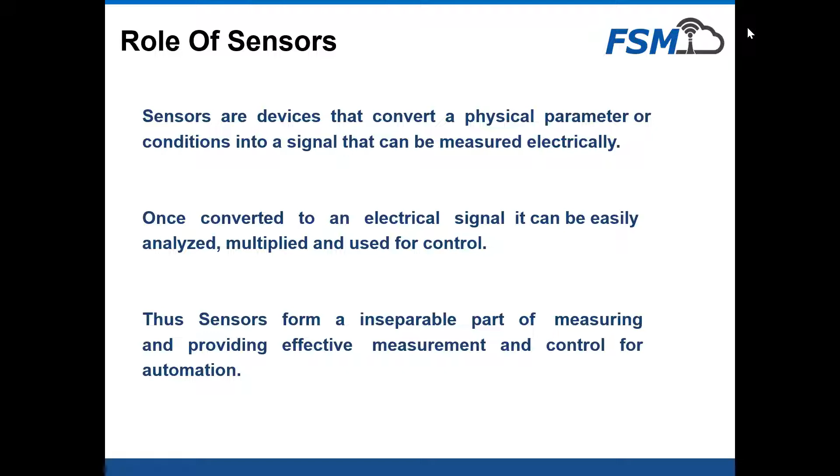To begin with, we all know what sensors are. Sensors are nothing but devices which convert a parameter into a signal which we can measure electrically. So it is a change in the physical parameter which can be converted into an electrical signal, and these signals we can take into our control system, and then we can do decision making concepts or control the loop, making a proper closed feedback system.

We can see sensors being used in almost all types of industries, whether it's manufacturing, engineering plants, automotive industry, mobile equipments, material handling - which is an industry coming up very widely in the world as of now - printing and paper, food industries, processes, packaging. So all types of machines being used or present in manufacturing, they use sensors for controlling the system, giving feedback to control the machines.

Now in this presentation, I would be discussing different technologies that are behind the working principle of these sensors and how these sensors have evolved.

When we look into the industrial application portfolio, we can see a couple of years down the line, major applications that we were seeing in industry were detection type applications. Detection means detecting the presence or absence of a component, whether they are present or not, and the sensor would generate a digital output or a signal.

Now this has evolved into measurement systems. That means not only does the sensor sense the presence of a component, but also gives you the measurement values - in terms of how far the object is from that particular sensor. Further evolvement happened when it started giving you position values - that means it can give you the exact position where that system is, with a high accuracy of few millimeters. That is quite possible.

One application we have seen in the industry is where we sense the wheels of a wagon - the wheels of the train that is coming by. This is an application seen in a metro, a daily metro, or a DMRC application. These trains, as they move on a platform or track, need to be lubricated. There is a lubrication pump attached, and at certain points in time, lubrication needs to be done. So these sensors are mounted on the track.

As and when the wheel comes into that area, meaning the train has just arrived or is there, it gives a feedback. The feedback goes to the controller, which opens and generates an output so that the lubrication of the wheel happens in the system. This is a basic sensing application where we sense only the presence or absence of a metal target, and based on that we take a call and perform a certain operation.

Similarly, there are a lot of applications where we need to detect presence. Weigh bridges are one such application area - we weigh the load being carried on a train. We need to measure the weight of that truck or bogie. When a wagon arrives at that weigh bridge, we need to take a feedback.

When the wheels are at a proper location, only then should the feedback be taken, and the weight taken into the controller. So these sensors make sure they sense the wheel in a proper position. A combination of multiple sensors positioned at different distances enables detection of the wagon at the right or appropriate position, thereby taking the weight of the wagon and giving it to the controller to decide how much material is stored in that particular wagon.

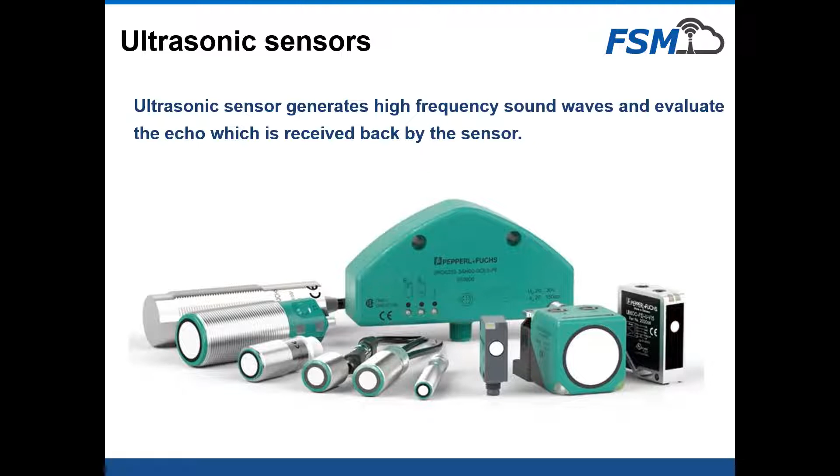So these sensors are widely used in applications where we need to measure the level. One such application is measuring the level inside wagons. This is one of the applications we have done for a steel industry, which has a train carrying raw material. The raw material is in the form of coal or coke, carried from the mines. Here we need to check the level, how much this wagon is filled, whether it's half filled, full filled, or empty.

For this, none of the sensors would work properly except ultrasonic sensors, because photo sensors, as I said, will not be able to detect the difference in colors. So ultrasonic sensors mounted at the side or at the top were able to measure the level inside the tank, inside the wagon, and generate an output. Based on that, we can check whether it was half filled, fully filled, or empty. These sensors also have the flexibility of giving an analog output, meaning you can get 4 to 20 milliamperes directly as an output. So that was one application done for checking the level inside the wagon.

Secondly, another application we come across: most wagons used in the industry are very old, and over time, the walls of the wagons bulge out. They bulge out because of the load being carried, since the material is dropped from a certain height, damaging the walls of the wagon. So when the wagon is entering a house, it should be within a certain bandwidth, else it can collide or crash with the wall and damage the whole structure.

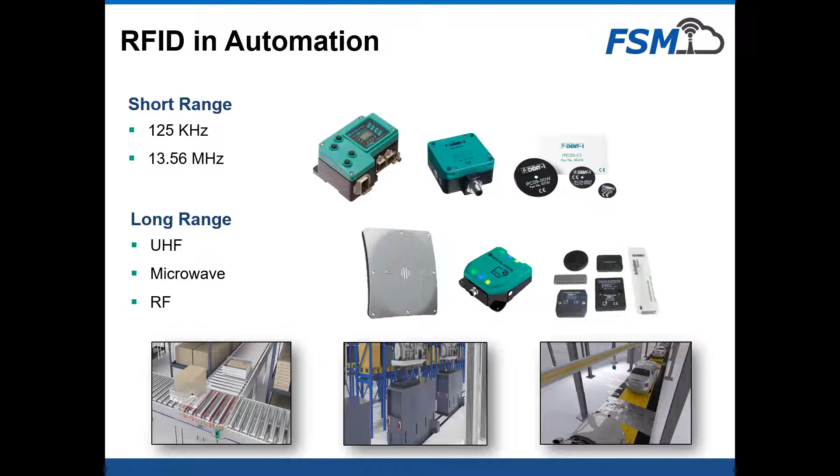As the component moves from one point to the next point, all the relevant operations that have been done on that component are stored into the tag. And at the end of the production, all the information is read back from the tag and stored inside the servers, thereby maintaining the genealogy of the product from the raw material to the final finished product. So this is what RFID systems can help with in the industry. Let me share with you a couple of applications that we have done or we have seen in the industry. Identification and tracking, as I was saying, is a very common application.

Since you all are from the railways, you must have heard about TCAS, that is Train Collision Avoidance System. What we do in this is we have a reader which is mounted below the engine. The reader has to read a tag which is mounted on the bed of the track. When the train approaches, the reader will read the tag and give the information to the controller of the engine, and from the engine it gets to the centralized location. That means this train has reached a particular location. So if there are two trains approaching on the same track or nearby to each other, the location is automatically transferred, and based on that, the controlling can be done. This was a project, I don't know at what stage it is as of now, that was started a few years back where RFID was considered as an option for collision avoidance.

Another thing which I've also seen is the same system being used for certain engines, I don't know the exact word, please help me out with that after this. There are small engines which have equipment inside them, which are supposed to monitor the track of the particular route. This engine is equipped with all types of equipment for checking whether the track is fine or not. So if there is a problem at certain locations, how do we identify that? Here again, the tags mounted on the beds are used. The reader reads the location, and based on the parameters, they know at which particular location the track was damaged or would require repair work. So this was another application which I have seen in railways.

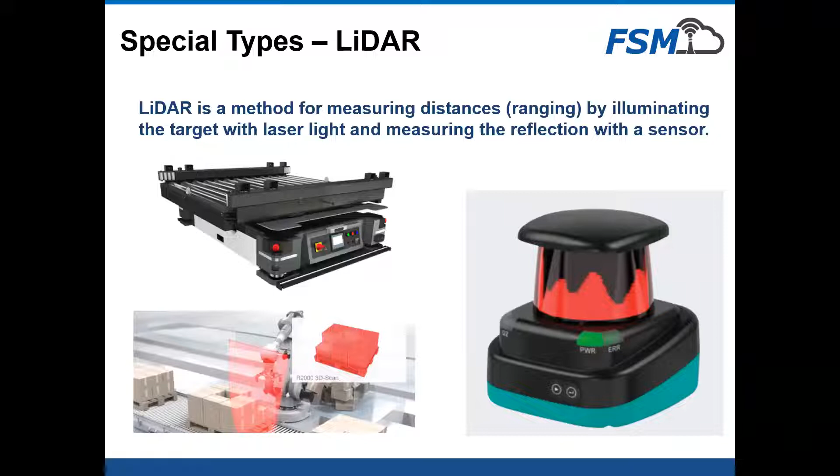These types of lidar sensors are also widely used in industry in material handling where we have AGVs. Today we talk about AGVs moving, and AGVs are automated guided vehicles. These vehicles move from one point of the plant to the other carrying raw material without any operator on them. So lidar sensors are used for navigation purposes. The same thing can also be used for profiling of the component.

There is a simple application example where we use this type of lidar to check whether this particular truck is empty or not. Since the lidars are rotating at a very high speed, we are able to generate a point cloud. We are able to pick up the points and measure the distances at each and every degree. And based on each and every degree, we are able to get the distance of the object.

And based on that, we are able to make the profile of the whole truck. So we can know which area was empty and which area was filled up. So this is an application where lidars are widely used.

Moving on to some special sensors, vibration is one of the most important aspects today. We need to do a condition monitoring application. That means we want to measure certain key parameters of the motors that are being used, and vibration is one of them. So vibration sensors measure the amount of vibration that is there, and based on the vibration, it will generate a 4 to 20 milliamperes output.

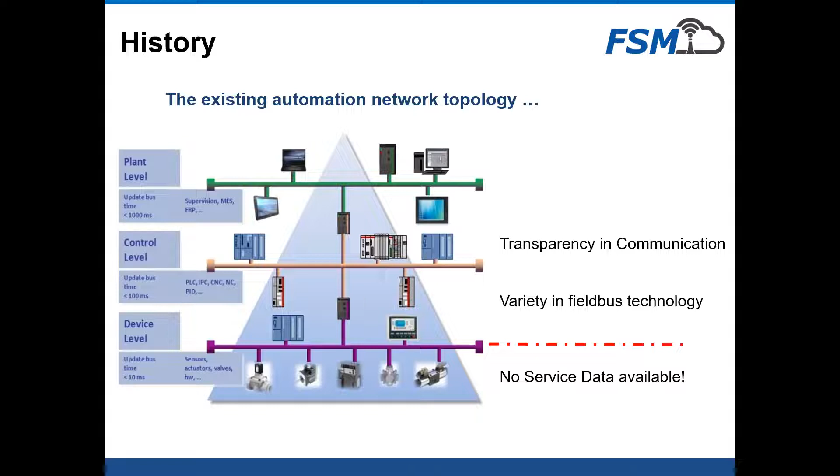But now these sensors are so developed that the field devices at the lowest level of the hierarchy can now communicate directly to the ERP system, to the plant level, or also to handheld smart devices. These sensors at the lowest level did not have any service data. That means they were only able to transfer a signal in the form of digital, that is 0 or 1, or an analog signal in the form of 4 to 20 milliampere or 0 to 10 volts. That was only a one-way communication.

So now, since we are talking about Industry 4.0, we want these sensors to become smarter. They should not only transfer the information, but also be able to receive communication. That means it has to be more of a two-way communication. Plus, they should have memory inbuilt. They should have an identity and be able to identify themselves. They should be able to do diagnostics. That means if a sensor is about to fail, the sensor itself should give feedback that I am going to go down, and based on that, the sensor can be replaced before the actual failure happens.

All this is now possible with a technology inbuilt into a sensor, which we call IO-Link technology. IO-Link is a communication technology that is nothing but a small chip added into the sensors, thereby making them smart. These sensors can now not only transfer the basic values, that is the digital signals, but also do diagnostics at the sensor level. They can do continuous communication with not only the PLC, but also transfer the information directly to the controllers at the plant level, or directly to the cloud.

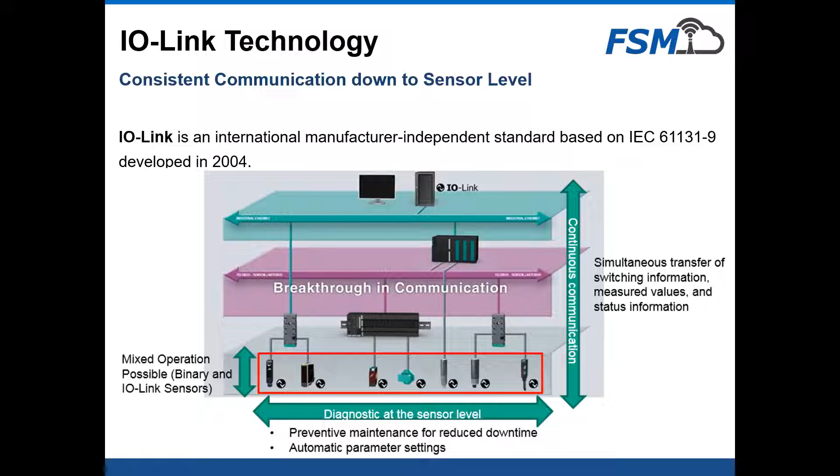Another benefit is that with this technology, it's a bi-directional communication. Like I said earlier, the sensors were doing only one-way communication. They were only giving you the feedback. But now the controller can talk to the sensor, give it a command to reply back, and based on that, the sensor can transfer the information back to the controller.

So what all can we do? There are a lot of other parameters apart from the process values we can get from the sensor. We can get the health of the sensor. We can get how many hours the sensor has been working. We can change the parameters of the sensor remotely. We can get all servicing parameters. All those parameters are now available inside the sensors, and for that, we are no longer dependent on PLCs. We can do it remotely. From my control room, I can teach a sensor according to my need.

I'll give you a simple raw example. For example, I am using a small ultrasonic sensor, which is supposed to detect the object from a distance of, let's say, 100 mm. Tomorrow, the size of the component has changed and increased, and the sensing distance is reduced to 50. So what I need to do is go to the machine, go to the sensor, and teach the new parameters to the sensor so that it can work accordingly.

But with this IO-Link feature, if I have a sensor connected to the control room, sitting at my control room I can change all those parameters. So wherever we have batch processes or processes where we need to change the parameters frequently, all that can be done sitting at a remote location.

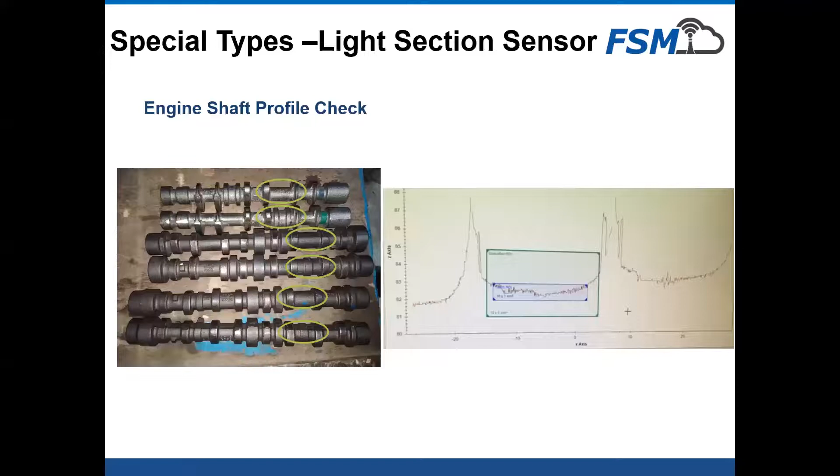Sir, in railways, we prefer wheels with a certain profile. Can this profile type sensor be used for detecting whether the profile has gone wrong? Because some derailments have taken place due to the wrong wheel profile. So can it be used here? Yes, sir, exactly. The sensor I showed you with vision built into it, this one, can be used, sir. We can check the profile because, as I said, it can check the gap, the angle, the stretch, and everything. So this could be the right product for that.

Okay. And my second question is regarding the water in the tank. We have a lot of watering points in different locations. Can the sensor be installed in the water tank of coaches so that we know the quantity of water in a particular tank? Yeah, we can do that, sir. See, what we have generally done, not only in railways, it can be done at a lot of other places.

Like you were saying, in a water tank, the sensor can be mounted at the top. Based on that, these sensors can generate not only switch output but also analog output, so if you want continuous monitoring, that is also possible. We teach the sensor the empty level inside the tank and the filled level, and between empty and filled, the sensor will generate 4 to 20 milliamperes, so we know how much it is empty or how much it is filled.

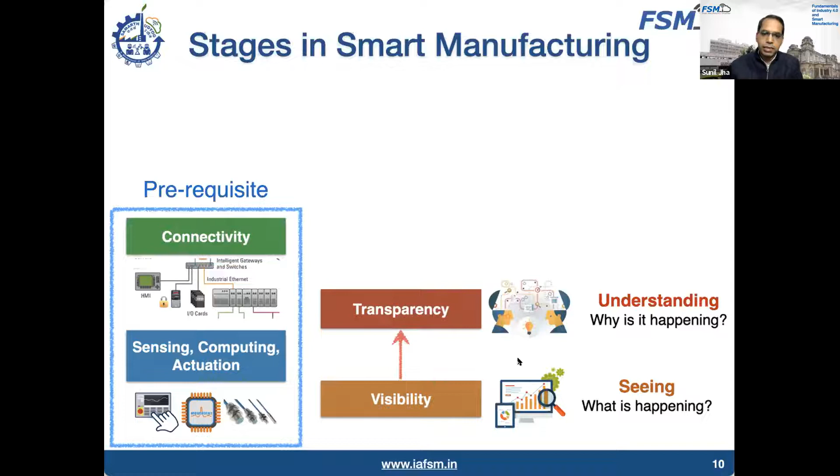Once we build this transparency, we talk about building predictive capacity in the organization. This is a very important part when we discuss predictive maintenance, prescriptive maintenance, and the proactive approach I discussed yesterday. We will be preparing the organization for such incidents in advance. That kind of predictive capacity can be built through the implementation of these technologies.

So once you have that data in the system, these are all the services that build on top of that data and the information generated. You will be building predictive capacity in the organization, preparing it for such incidents to happen before they actually happen. That is the next stage.

Later, we implement the adaptability part, which I also discussed yesterday. Finally, we want action to happen - corrective action should be implemented and the system should self-adapt to changes. Whether it's optimization or corrective actions to be taken, we are looking forward to such autonomous decision making happening at the system end, which will then be finally implemented.

That is what we are looking at right now at the higher stage of Industry 4.0 implementation. As we go along these stages, we build these capabilities in the organization to reach Industry 4.0 implementation. We start with the basic building blocks, which is where most industries are right now - establishing connectivity, bringing out data, and I'm happy that most are able to reach the visualization level. Post that, building transparency, predictive capacity, and adaptability is the next stage of implementation. What kind of services you can build on top of that data is more important to reach the last stage of smart manufacturing implementation.

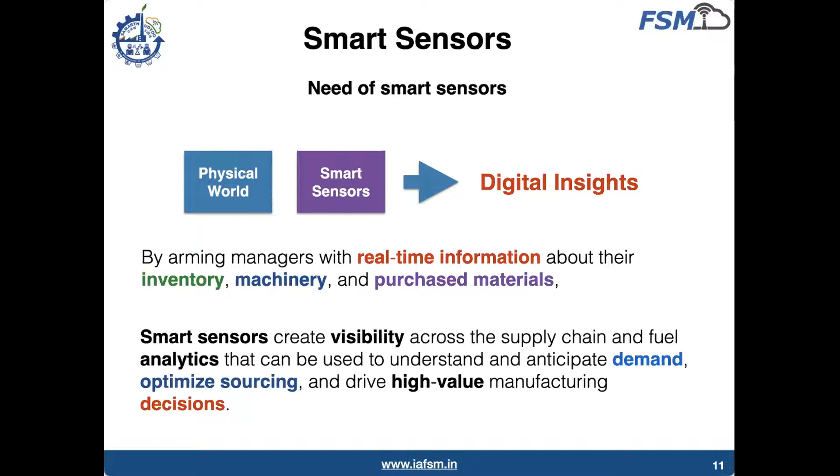So that is the idea of getting a smart sensor - not just a parameter, but much more additionally. Many times the sensors are also now capable of doing some basic analytics themselves. So if you look into the future of sensing and the recent developments today, actually, it's not just a sensor - you need to build a lot of technologies at the back end to utilize the information coming out from the sensors.

So when we talk about recent developments in smart sensors, certainly the basic parameter you capture from the sensor is one important part. But then you need a lot of analytics tools at the back, because what are you going to do with this data - who is going to analyze it? To extract meaningful insight from the sensor data, you need access to analytics tools, and that is how you will be able to analyze all the sensor data coming to you and make a meaningful inference out of it.

How you are going to handle this data - just placing a sensor will not serve the purpose unless you have a backend system to handle and manage this data. That is where the role of big data comes in. People are talking about multiple types of data - vision data, sound signals, vibration data. So there's a lot of types of data coming, and how you will manage this big data, what kind of platform is required to handle it - understanding and the capability to handle this kind of data is also required.

So implementing smart sensing just starts with a basic sensor, but then you require a large number of technologies at the back end to really utilize the sensor information.

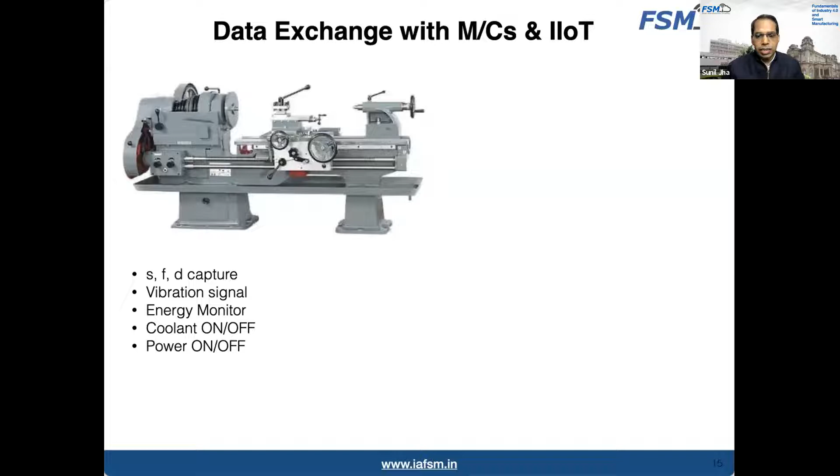So this was the problem we were discussing yesterday, that we would like to convert a machine into a smart machine, and we talked about the different sensors to be integrated into the machine. But after that, how will you exchange the data between the machines and the IIoT? That is how I will be explaining this block further. To implement connectivity to this machine, certainly we would like to place multiple sensors onto this machine. So whatever Sudhanshu has explained, let me just carry that discussion.

So we have converted this equipment, which is a legacy machine, in our central workshop with the integration of multiple sensors. The first idea for implementing on any legacy machine is to think about the machine and the need for those critical parameters. Then we have to identify the right sensor for the application. In this case, we need to measure the feed and depth of cut, and these are all displacements. So we need to identify a right displacement sensor for the measurement of the depth of cut and the feed rate.

So if you can see, along the bed of the lathe machine we have placed this feed displacement sensor. Across the carriage, we have placed the sensor for measuring the depth of cut. And when you have these kinds of sensors placed onto the machine, you need to have some kind of controller to capture that data. So we have used a small controller with an HMI inbuilt into it. All the analog sensors are interfaced to that.

We also have some proximity sensors to sense the RPM of the spindle, and to sense the presence of a key for tightening the chuck. As a safety measure, we have integrated that part. Then there are the vibration sensors, how you will take out that vibration sensor information, and certain IOs. We also added RFID access to the machine. So the idea is that once you have these kinds of sensors and devices, you need to connect them to the controller. That is what has been explained.

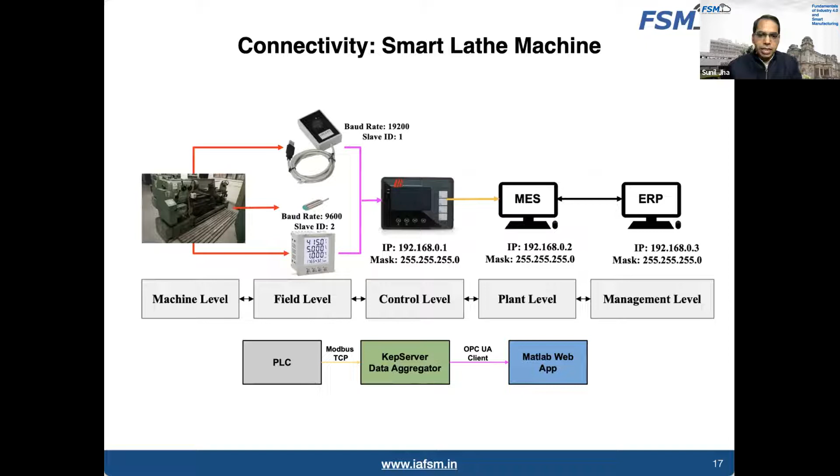And then from there, we will be taking it to the manufacturing execution system and the ERP systems. So that is where the connectivity of the lathe machine till the enterprise level is very important. What I was just showing, the multiple layers. So we have done this project, and we have already exercised the implementation of the concept of the IIoT in this case. What all tools are required to implement this is very important to understand.

And then certainly you can build up these kinds of smart applications once you have the data, for visualization and for monitoring purposes. So what I will suggest, I will try to utilize the rest of the time in the first session itself to give a quick live demonstration. My colleague, Mr. Arun Kumar, has joined from the FSM lab. I just want to give you at least the practical hands-on on what we are talking about, and the theoretical part will continue in the subsequent sessions.

So I will stop the sharing over here. I will request Arun to please be available from the FSM lab and then share the connectivity part with the sensors. Over to you, Arun.

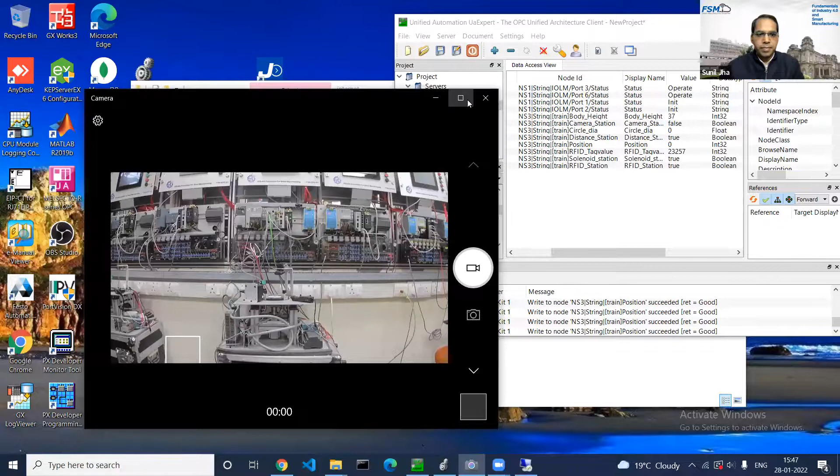Hello, thank you, sir. Good afternoon, everyone. I am Arun, and I'll start this session by introducing you to the components of the PLC training kit. Arun, we can't see you right now. Can we see where you are right now? So you will be explaining those systems, so then we can see it. Yes, sir. Sir, is the screen visible now? Yes, Arun, we can see that.

Okay, so I'll start by introducing the components of this kit. This is the smart kit which we have for demonstration purposes. The first component is the SMPS, that is, switched mode power supply. It converts 230 volt AC into 24 volt DC. All the devices used in this kit use 24 volt DC input, so this device provides that input to the other devices.

Then the next component is the PLC. This is the brain and the controlling device of this kit. All the programming is done in this PLC itself. It has embedded DIs and DOs. It's a Rockwell PLC in this kit. There are other kits which have other controllers like Siemens and Schneider, etc. Then this is analog input and analog output. Then this is the Ethernet switch.

It's a managed switch. The difference between a managed switch and an unmanaged switch is that an unmanaged switch only lets the devices communicate with each other, and it does not provide any security in that communication, whereas this managed switch provides the security part. So you can configure the port depending on the device which is connected on that port.

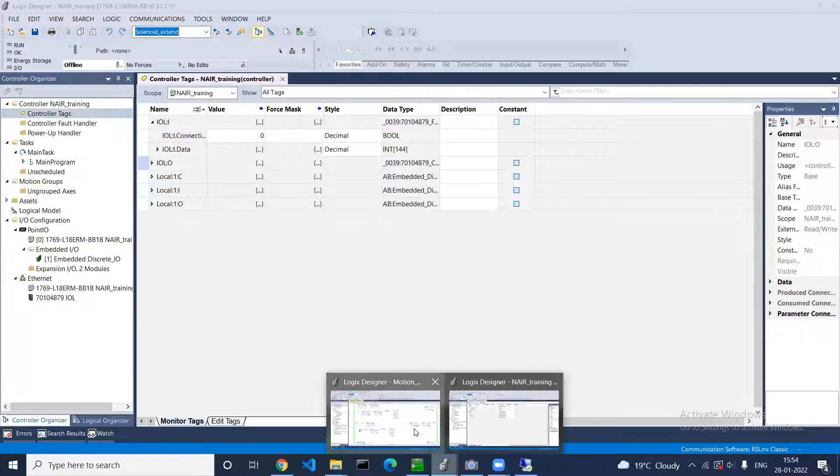So these are the bytes. So in IOL:I, you will get the input from the IO-Link master, and you can also give output to that IO-Link master using this IOL:O. So I have already downloaded one project in the PLC. I will just show you that. So this is the project, and

these are the input bytes of the IO-Link master. So this is the RFID data which IO-Link is communicating with the PLC. These are the input bytes, and these are the output bytes on which I can write. So these are the bytes which are used to write on the RFID tag that is present on the part. So I'll just show you by rotating the disk how this RFID controller is reading the data from the RFID tag.

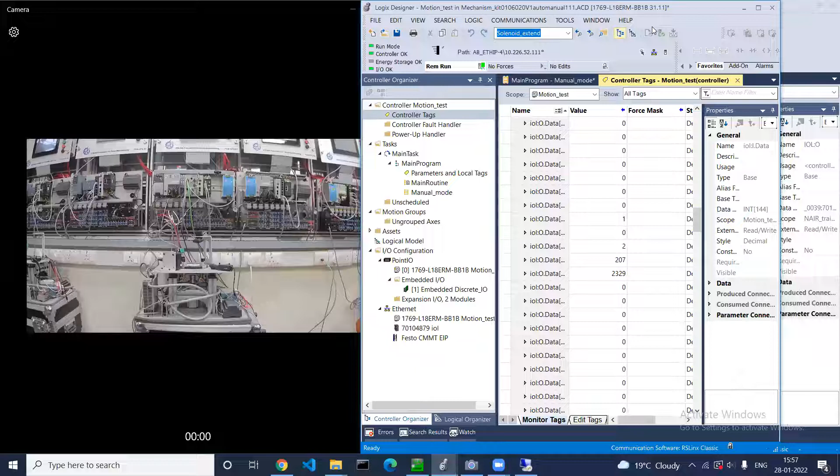Now I'll show you how to send the data from this PLC or from this IO-Link master on OPC UA. So you can also send the data from the IO-Link master directly through OPC UA. So this is the KEPServer platform. This is used to collect the data from your hardware controller, and then you can send this data to any IoT platform.

So you just have to create a channel. So these are Allen Bradley for Rockwell PLC. You can use these Ethernet channels also. And for OPC UA, you just have to add OPC UA client. So I'll add this IO-Link master directly to this KEPServer platform. And you can see the tags.

So I have created a channel with name IOL, and now I'll add the device. So now I'll import the items, that is, this KEPServerEX will import the tags from this IO-Link master. So this is communicating, and I'm getting these tags. I have connected these sensors, RFID and this ultrasonic sensor, on port 3 and port 6. So I'll just add the status of port 3 and port 6.

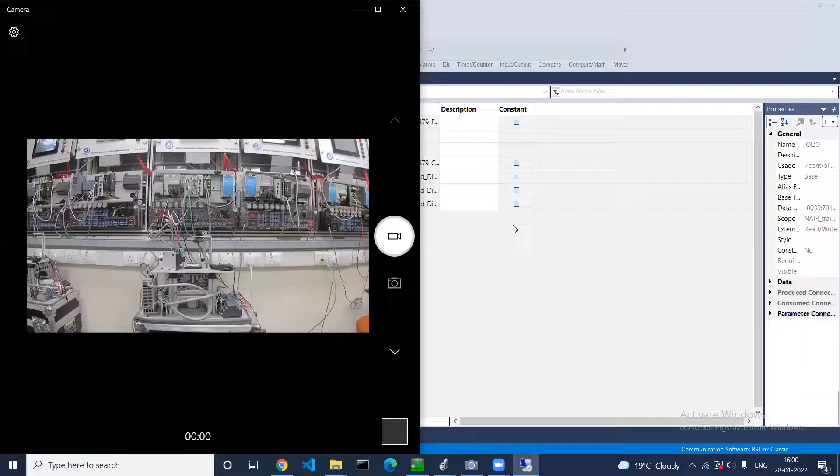Similarly, I can also add the PLC and I can get the tags of this IO-Link master through the PLC communication also. So I'll just show you the dashboard for this kit, and when I rotate the kit, you will see this tag value, height and diameter parameters changing. So this is the IoT platform. You can access this dashboard from anywhere. So I'll just rotate the disk.

And now you can see the data changing from this RFID, for this RFID tag, and the height of the product.

Thank you, Arun. Anything else you are showing? No, sir, I think. Okay.

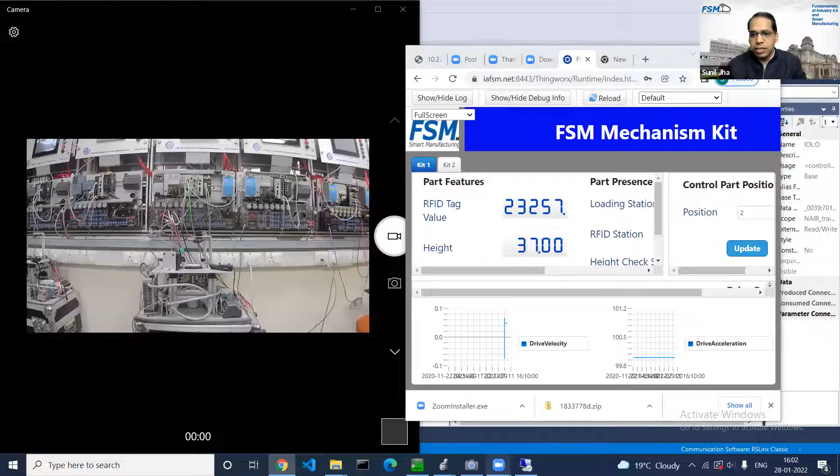Thanks for this quick glance on the kind of technologies involved in getting the data from the basic sensor and how we will be using that sensor data. So the idea behind this 15 minute visit to the lab and giving you an idea about the different platforms involved is just to understand the kind of technology understanding required to bring out the data from the systems and finally take it to the IIoT platform and create a visualization.

Because till now we have just created the visualization. So we'll subsequently discuss in the coming sessions how these implementations happen, and within the time available to us, I will only be giving you the overview of the technologies. Normally when we conduct detailed in-depth sessions, we take all the participants through these hands-on exercises, because it is very important to understand how these things will be implemented.

And this revenue stream benefit is not particularly for end users like railways, but on the OEM side, there are various business models like selling compressors on an OPEX model, where OEMs charge the end user for the amount of running hours of the equipment. Those kind of revenue streams are also possible with the help of smart machine technologies.

Then it also leads to IP protection, which is a big topic today. Cyber security. Many of these machines have vulnerability to IP protection, right? So any vendor can come with a mischievous intent, and they can steal the IP of the machine. So with the help of digital technologies, companies can ensure that they build defense in depth concepts into the basic machinery, so that their IP stays with them. So it reduces risk in that way.

Some of the common challenges we hear from the market when we talk to customers regarding digital transformation is that customers don't have time to execute digital transformation projects, or they feel their machines are already smart, or their IT department won't give them permission, right? But sooner or later, everybody is going for these kinds of initiatives. The IT department may not give access, but definitely for the CEO of a company, for improving the COGS or the turnover profitability, these initiatives are a must.

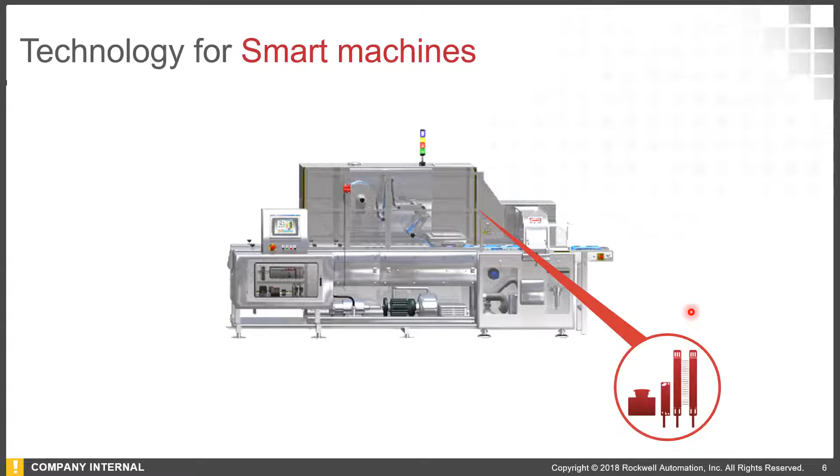Based on this stored data, we can create more efficient workflows for the machine so that it performs at the highest optimal level. That basically constitutes the smart machine - how we are able to turn real-time data into a contextualized report, to analytics, to optimizing the workflows. If I talk about basic technologies for smart machine, the first one will be integrated safety. So generally a saying goes like productivity is inversely proportional to the safety system, but that's not true.

The higher the safety on the machine, the more productive it will be. That has been our experience, and as per studies done by global agencies as well. So integrated safety is absolutely a must building block for building a smart machine. Then smart sensing - with the help of technologies like IO-Link, it is possible to take the sensor onto a network and collect relevant diagnostic information from these sensors so as to increase the uptime of the machine and also improve the process workflows.

Then smart motor control - you may have VFDs, soft starters built into the machine, but how do you leverage the information coming out of the smart motor control systems? That also constitutes a building block for smart machine. And then once you have all this, on top of it, we have IoT platforms, which ensure that the machine provides value beyond its own sum.

This machine may be producing one component or doing one task of the operation, but with the help of smart machine, it can provide greater value to the entire organization than its sum. If I talk about the first one, the integrated safety - this is a graphic for a plant. This plant has machine safety components built into the machines. As you can see, the diagnostic available is of an advanced level.

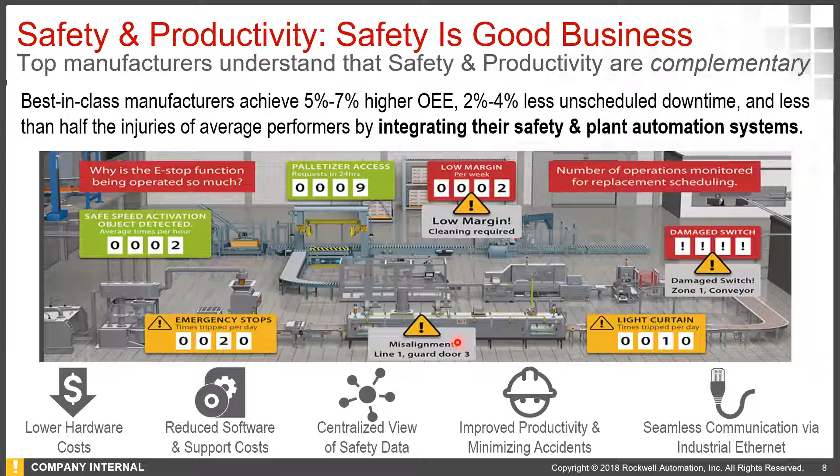Second component is smart sensing. With the help of IO-Link technology, you can take sensors onto an IO-Link network, and with the help of that network, sensors will themselves give diagnostic information through the network, like parts count, or if the sensor is overheated, or there is a setup issue on the sensor. All that information will be available with the help of IO-Link technology.

So very popular technology these days for sensor technology, and this can directly be integrated into the controller of the machine, and all the diagnostic information is available from the sensor onto the local HMI or to the higher IoT platforms. It also gives timestamp data and diagnostic about the sensor health to the control system. And then multiple profiles can be stored inside the sensor.

For example, photo eye, for different kinds of packaging, different teaching is not required. A recipe can be downloaded from the HMI to the machine, and that reduces the product changeover time.

IO-Link is a worldwide open standard. It is a peer-to-peer serial communication protocol, and it is forward and backward compatible with the standard sensors that come into the market, as it uses the same cables as the standard sensors, and this can transmit data from IO-Link and further through EtherNet/IP to the IoT platforms.

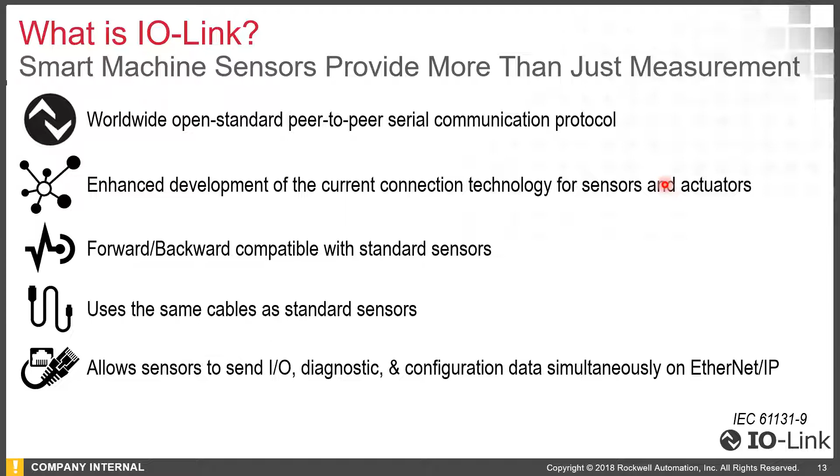So these are the 3 use cases for smart sensing. Predictive maintenance: it is able to preempt that there is a low margin, and based on this alert, operator can take action, or they can store the recipes, change sensor configuration on the fly. So that they need not do the manual adjustment after every batch. Replacement: it takes a lot of time to first of all find out where the problem lies. In case of a smart sensor, it will automatically prompt that it is faulty, and the troubleshooting time will be very less with the help of this kind of technology.

If I talk about smart motor control, if variable frequency drives, soft starters, or smart overload relays are on the network, then we get not less than 50-60 parameters per motor onto our SCADA or HMI, whatever you might be using. It also gives you things like underload condition or jamming condition, time to trip, high vibration onto any pump. So all this diagnostic is available with the help of smart motor control.

And you may be already using VFDs, soft starters into your operations. Condition monitoring is something which is really becoming popular these days, where we track the vibration of the system through eddy current probes. This system connects to our central controller, and it gives alerts onto the local HMI. You don't need a separate offline analysis for predicting when it will fail. So this can be done in real time.

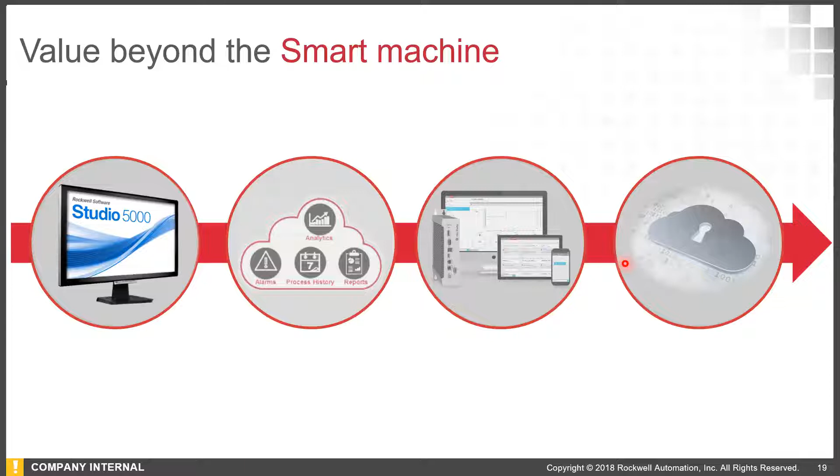So the first concept we'll talk about is digital twin, and we'll also show you a demonstration for this. So what is a digital twin? It is basically a digital representation or a digital replica of a physical asset. So how a machine behaves in a real environment, I create a similar twin of that machine into the digital environment.

And in case I need to do some modification onto the machine, first of all, I'll do the modification in the digital twin of the machine so that I don't incur investments onto the physical prototype. I do my modification into the virtual world, and in case it works fine, then I implement it. That really reduces my time to market, as well as it ensures first time right, which is a major KPI for many companies into lean these days.

So what are the use cases for digital twin? We can do the real-time throughput analysis of a line. We can do machine prototyping. We can do virtual commissioning without actually commissioning the machine in a physical environment. Design the machine, we can simultaneously do the virtual commissioning, so when finally we deploy the machine on site, the errors are very less or no error at all. And this can also be used for operator training systems.

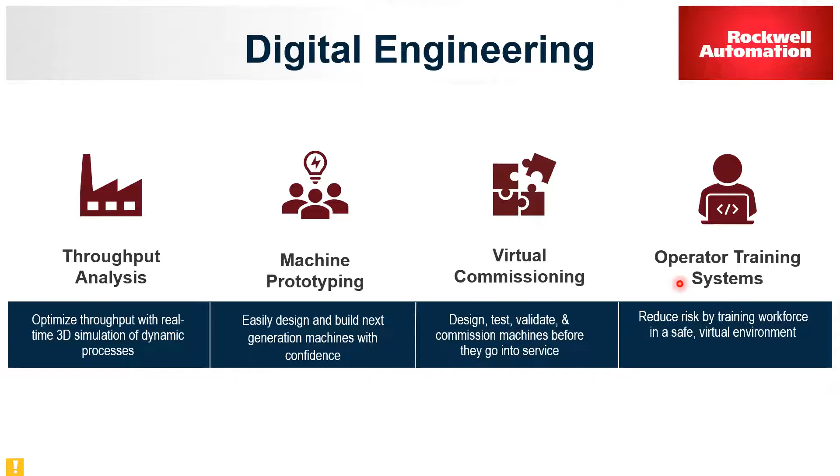With the help of a digital twin system, we can actually start the control testing as well as operator training while we are manufacturing the machine itself, so that we are able to finish the project well within time. So how do we do it? We basically merge your drawings, the 3D drawings, with the PLC logic, and we then have various conditions of kinetics and physical motion on top of it, so that we can have an animation which will behave as if you're doing work on the actual machine in the field.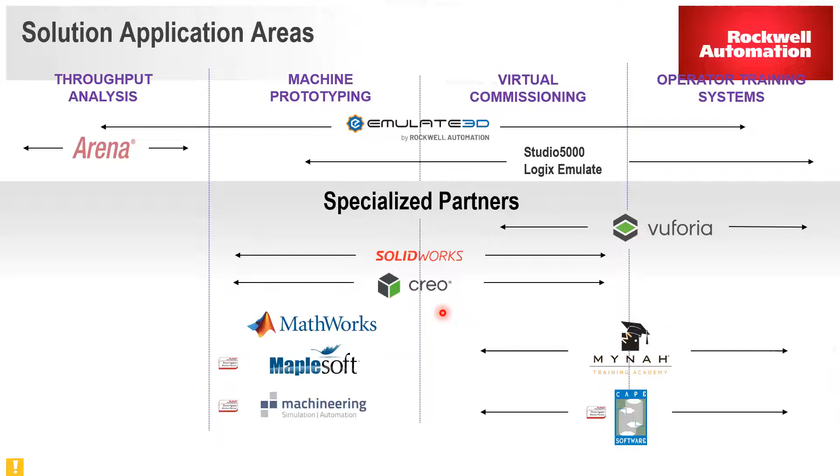So coming to the next topic is IoT platform. There are two approaches to digitalization. One is the application for a particular use case, like if I want to measure OEE of a machine, I build a separate software for that machine. Second approach is of a platform.

Just like you have Android onto your phone, or iOS, or you have Windows onto your laptops, similarly for IoT there is a concept of IoT platform, which is able to connect to any kind of device on the shop floor. Then on this IoT platform, we can build apps as per the requirement. Building apps on top of it results in scalable deployment as well as reliable deployment, because the services used are common for all the apps, whether it is OEE, quality monitoring, or any other use case. I have the basic infra on the IoT, and on top of it I build various apps.

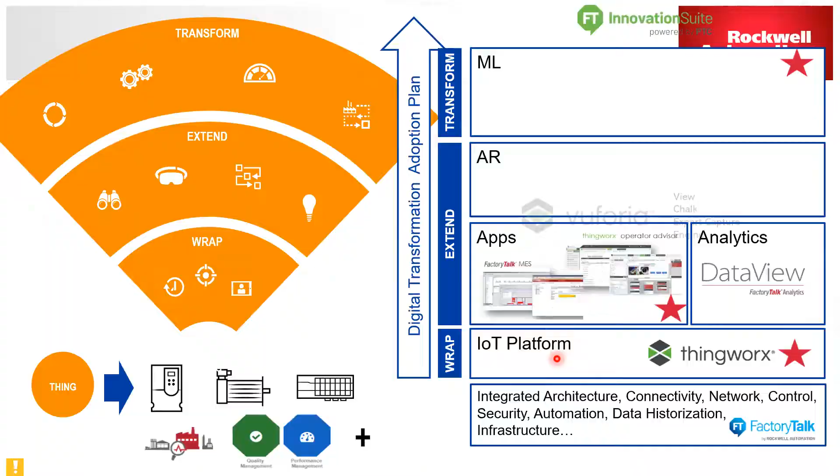The second concept is on augmented reality, where we superimpose digital data onto the physical world. Just to give you an example of this, we generally mentally understand the GPS images, and then, based on our own conditioning, take the action, maybe right turn, left turn, based on the GPS signal. But that is a little tricky in the real world environment when we are operating machines.

So what if we are able to get all the digital signal right in front of our eyes, in front of the screen? I have to turn right - I can physically see onto the road in front of me. So this is possible using the augmented reality technology.

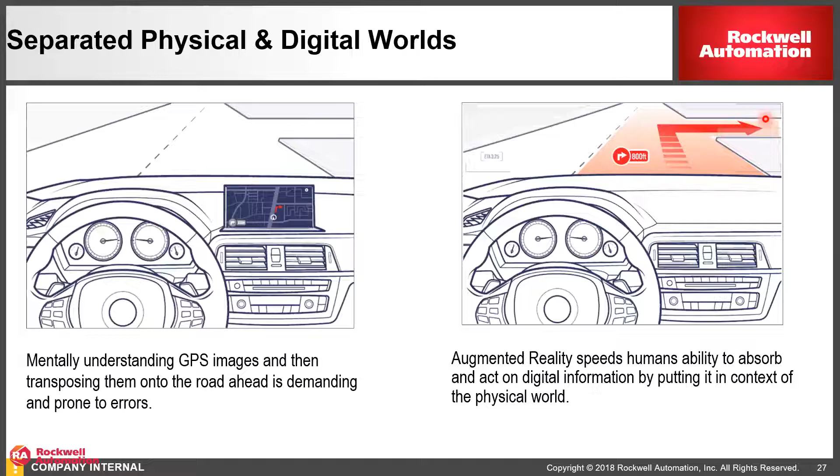Just one more concept, defense in depth. So when we are implementing smart machine technology into the plant, we have to ensure that we follow the cyber security norms. So we have something called defense in depth, which we have in collaboration with Cisco, and all our systems comply to this. So what we say is that there should be security implementation at all the levels into any smart machine implementation.

At the device level, this is the basic machine level - here we are disabling the unused ports and ensuring that the right person is able to log in. At the system level, we ensure that there is role-based login and right security measures are implemented. Then at network level, the switches are configured so that unauthorized access is prevented. So whenever we implement any smart machine implementation, we ensure that cyber security practices are followed into that.

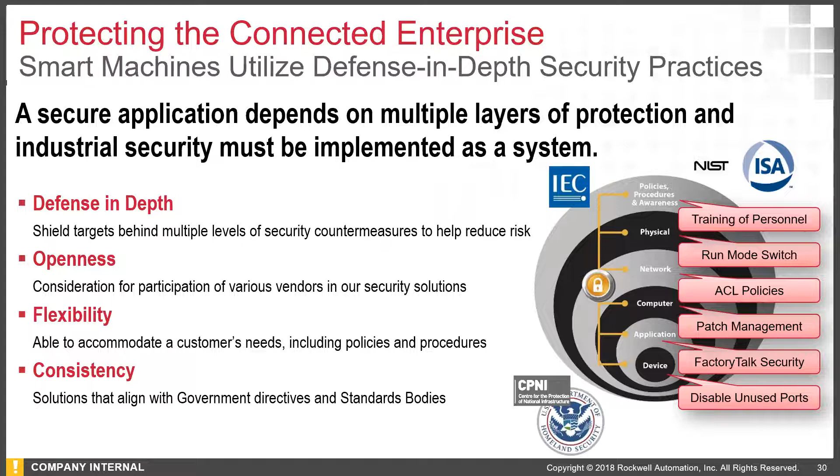Abhirat, are you on the call? Hello, yeah, thanks Pankaj. Just give me a second. Recording in progress, I was just trying to... Okay, that seems to be a little tricky. Okay, so let me just share my screen.

Pankaj, you can stop sharing your screen, then only we can see his screen. Are you able to see the screen? No, Pankaj has to stop sharing his screen, then we can see it. Yeah, now we can see.

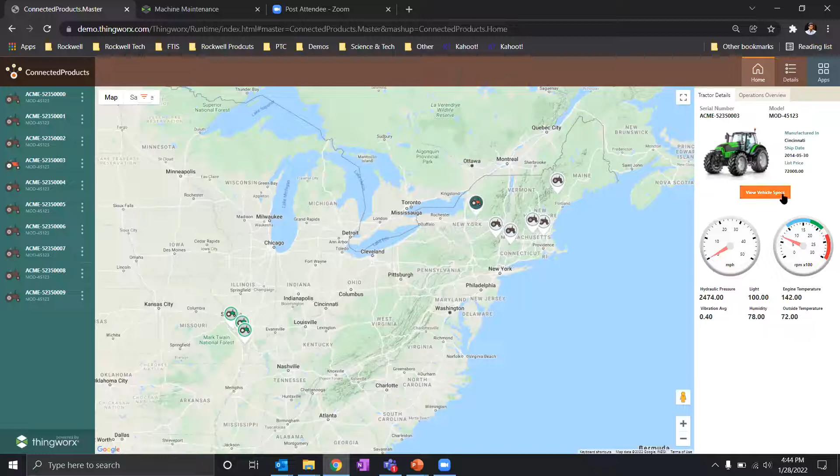Okay, so this is an example for the smart connected products, right? So here I have taken an example of smart connected machines. Basically, these are tractors, and all these tractors are connected. So I can see, by clicking on each of the tractors, what is the RPM at which each of these machines are running, or what is the location of each machine. And if you click on the specifications, we get to see the detailed specifications of these tractors.

So to go a little bit deep into why we are collecting this kind of data, we can actually select each of the products and see different plots and see how they have been performing. As in case of this tractor, we can see how and where they have gone, what is the route that particular tractor has taken. We can see the pressure readings, how the pressure of the machine has been dropping with respect to warning levels and critical levels.

When the pressure is dropping below this kind of critical level, the platform will give us alerts telling that, okay, there is something required. So you can see here corrective maintenance is required because it has gone below. It is hydraulic pressure. Same way, we can monitor different parameters.

You can see the speed going on here, how the pattern of speed was, how was RPM, how is the vibration of the machine going in x-axis, y-axis, and the average vibration, and other outside conditions, like engine temperature as well as ground temperature, how is it correlated. So by plotting these, we get a lot of understanding of how in detail these kinds of machines are working in the site. And on top of this, we are able to apply analytics.

So when I say analytics, I am switching to another use case now to show you a bit on how the analytics works. So this is something like a smart connected pump. You can see here, there are multiple pumps that are sending data into the IoT platform. So this is one particular pump. It's an auxiliary mesh pump. We are actually predicting how much discharge this pump is able to do.

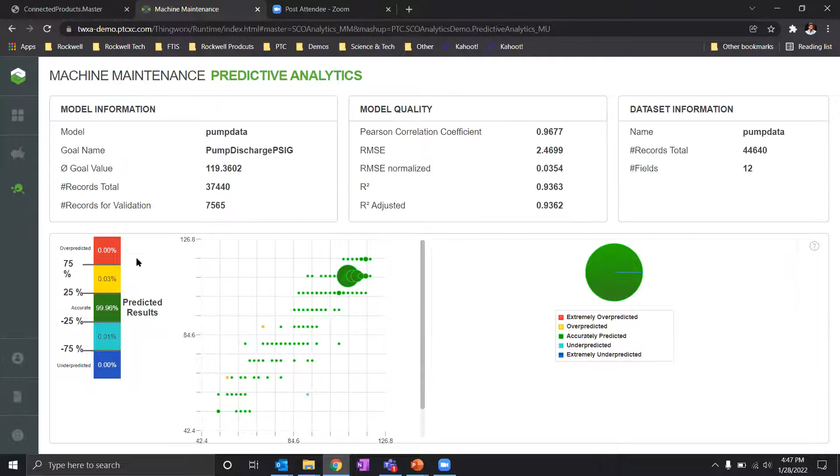And this is the model which is giving the prediction on what kind of discharge each of these pumps would give. And whenever there is a discharge which is going below a certain level, we will be getting an alert. This alert can be sent through emails or as text messages. We can integrate it basically into other systems also. So this is a demo on how smart connected products work along with analytics.

Shall we move to the next demo? Yes, I think for sure. Okay, so I was actually trying to give a live demo, but the Zoom app in my mobile... Yeah, are there any questions so far from the... Is there any question from the participants?

Okay. So I was trying to do the augmented reality live demo, but unfortunately I am not that well conversant with Zoom in my mobile app. So I will try to share the videos and give you an example.

Right. Okay. So here you can see this is a tablet. Our AR offerings support other devices such as HoloLens, RealWear, and even Magic Leap also. That's a new headset that has been coming out for the AR area. So this is a kind of sales and marketing use case that we have.

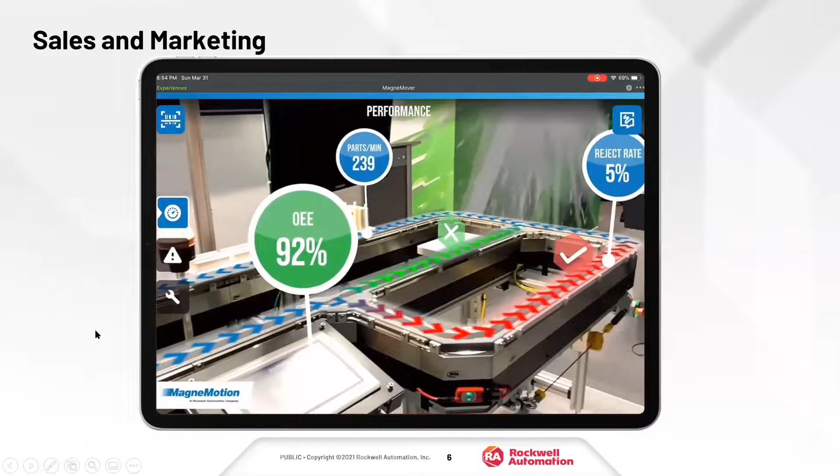So if you have a product, how we can enhance the experience on that by giving instructions like this: what are the areas that you are not supposed to touch, what live data monitoring we can do, or to identify different parts. Where is the motor, where is the track, where is the switch, where is the curve. So these kinds of use cases can be covered using sales and marketing use cases for augmented reality.

And then in part of improving training, so you can see here, this is the machine that this particular worker is actually assembling. And using a HoloLens, we are giving all the required information and different steps that he has to perform to assemble this particular machine.

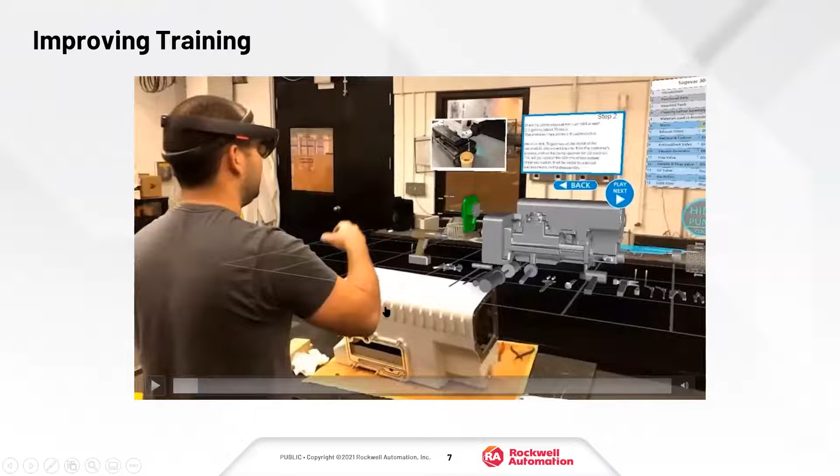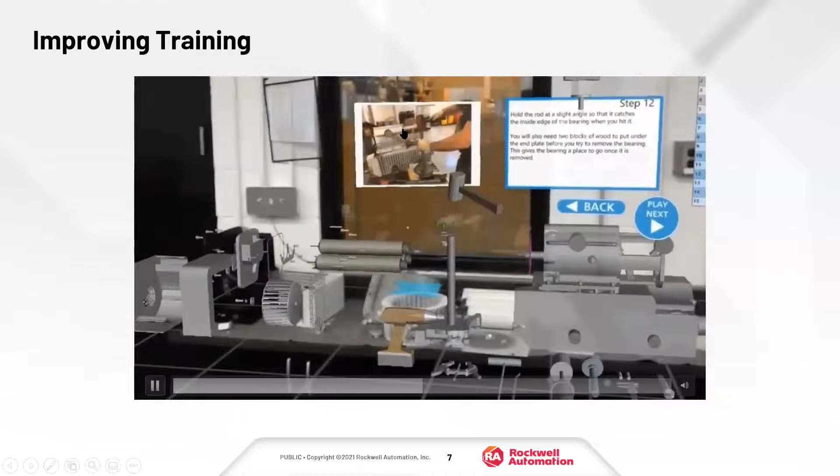So you can see here, it shows him the sequences in which the machine has to be worked out. It will also show him what are the tools that have to be used, which tool has to be used to what limit, what are the next steps. It also shows the pictures and other supporting documents that will give him confidence to do the work.

We can show them the internal working of machines. So many times these machines are not opened up fully and they might not have an understanding how it works internally. So we can give such kind of graphics which gives a clear idea on how it is actually working. So there are these kind of internal workings that we can show.

And ultimately, all this improves the confidence that any worker has to do some work or do an SOP on any machines. Also, this can act as a guiding app for the OEMs when they are providing it to their end customers. Any questions?

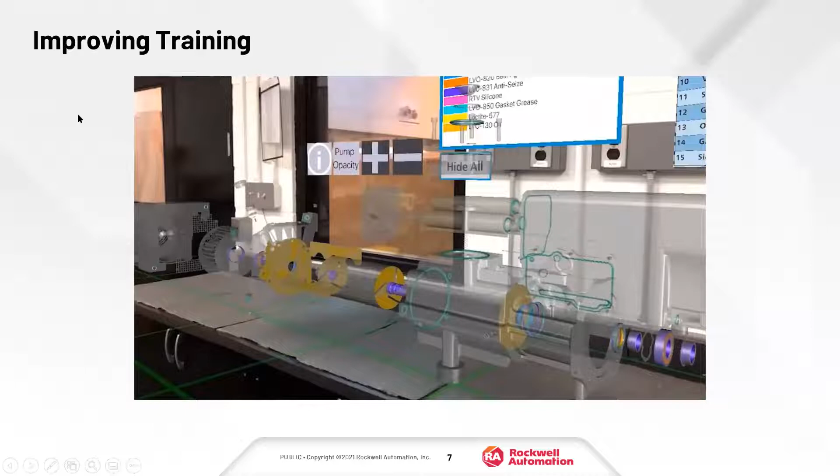Okay, so one of the last use cases is in field services. So this is a tablet view that we are seeing here. So let's say our platform can actually identify the machine based on the boundary of that particular machine. So you can see this is the boundary that we are tracking. And as soon as you see that the tab is placed onto the machine, it understands the machine, right?

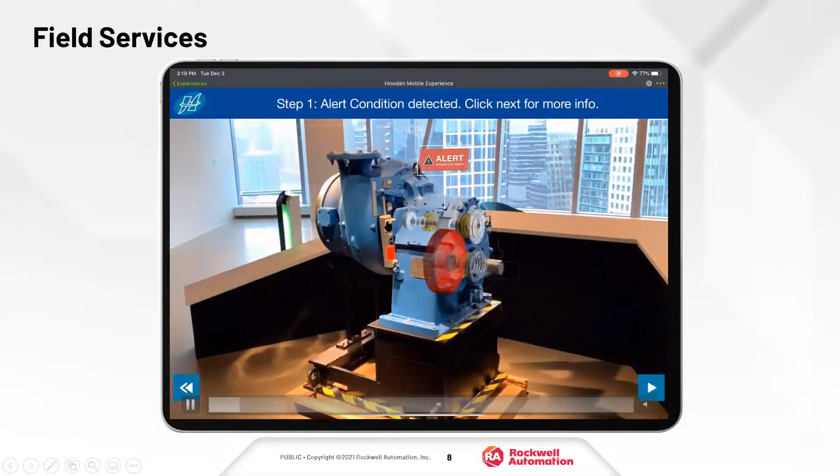So it is already telling you that there is an alert. So this alert is generated through the IoT platform. So the IoT platform passes on that information to the augmented reality app. And that's how we are figuring out, okay, this is the specific problem in the machine, right? So this is a problem that has been identified by the IoT platform. So there is something wrong with this particular gear in that machine, and there is an alert for that.

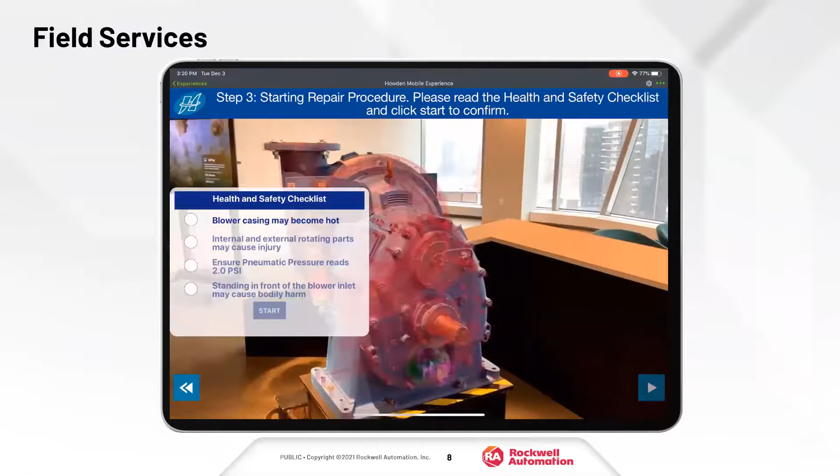And how do we rectify this? So we have to actually open this up and check. Before opening up the machine, there are some checklists that we have to follow. For example, you have to see if the blower is very hot, if this part is movable, ensure that some parameters like pressure are within the level before opening the machine, right?

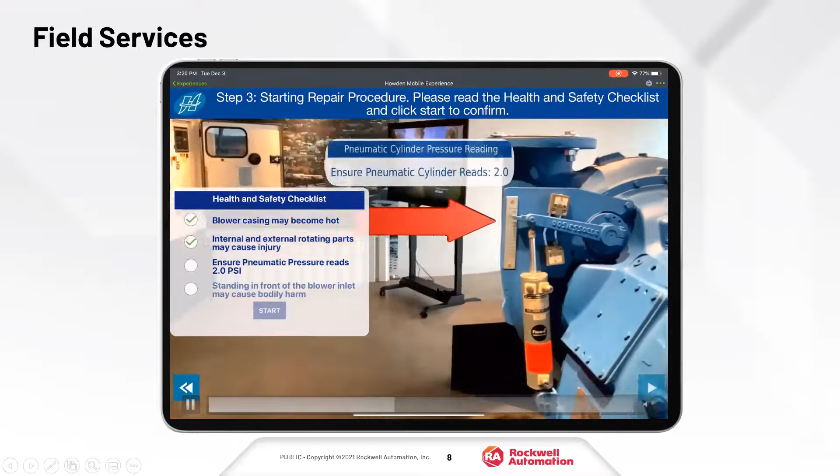And maybe we can also show some areas that are hazardous and people are not supposed to enter. So these improve the safety of the workers who are dealing with these machines, as well as take him through the correct steps on how to operate on the machine. So once those checklists are complete, next we will show the process in which he has to take out each part, how to disassemble the whole machine.

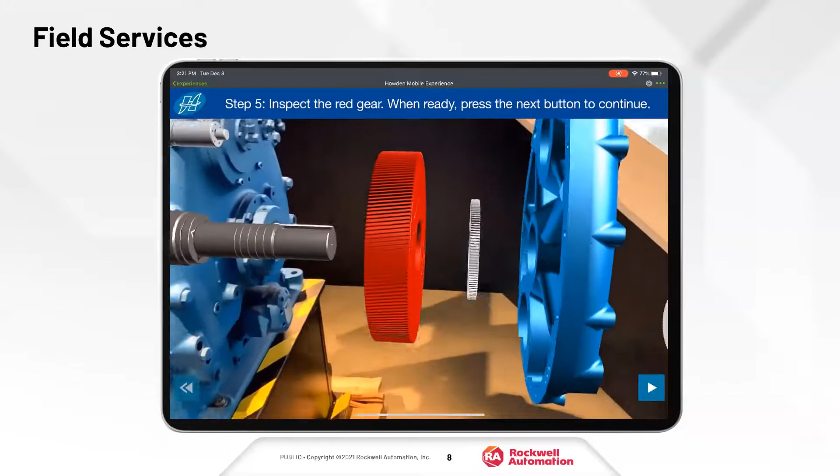So now here we see the disassembling sequence, which part by part he has to open up the whole machine. And once the machine has been expanded or exploded, we can replace that particular gear. And of course, once that particular gear is replaced, we will also show the reassembling sequence, which would be something like this. So this is the use case for field services.

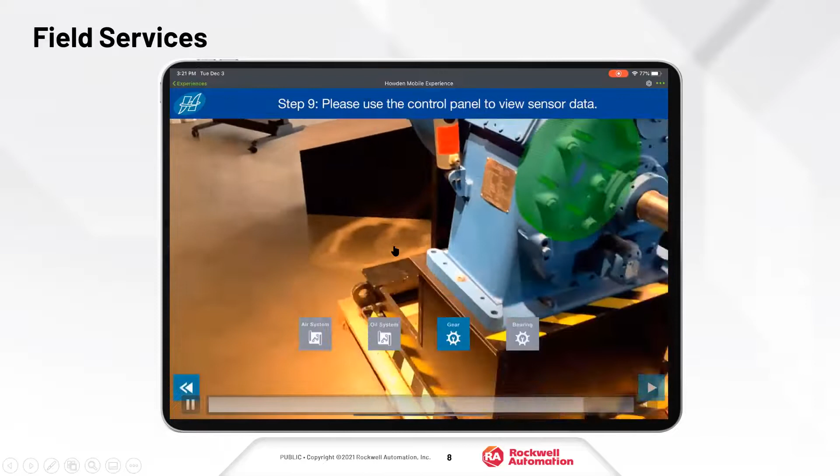We can also show, as we saw in the earlier use case, what the parts are and where each of the other parts lies. And we do the online monitoring too. So yeah, that's the demo from my side. Any questions?

Okay, thanks. And back to you, Pankaj. Thanks, Abir. Is there any question from the participants? So I see one question on which software. So this demonstration was for Vuforia Studio software.

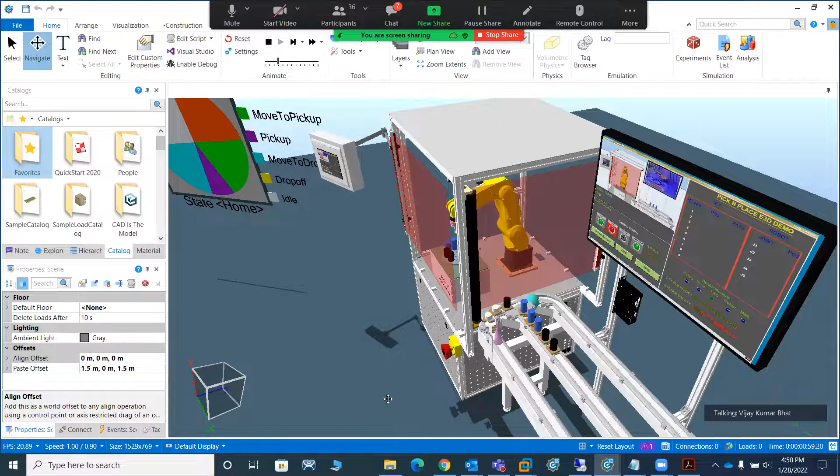And also you can see that it is equipped with some sensors here, which are sensing the height of the object and the presence of the object. And we are seeing all this in a digital environment. A Fanuc LR Mate robot is picking and placing the objects from the conveyor back to the station. Now, some data information is also available here. We're getting the time in state of the robot, what functions it is doing at what time, like going home or picking. And we are also getting some analysis: the total number of parts picked, the ppm of the machine currently, and the machine health state.

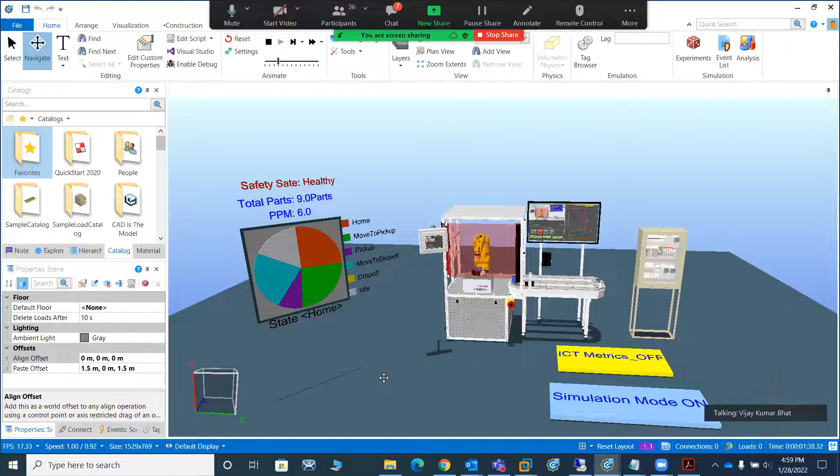If I hit the emergency push button here, you can see that the machine will come to a stop, and we will get information that the machine front emergency push button has been pressed. So as a process, we press it back and reset the machine so that it can start again. These kinds of animations can be incorporated into the digital twin, exactly the same as you will see in the physical machine. So if an operator wants to see what lies inside the machine, he can click on this box, open it up and see the various functionalities and equipment within the machine, within the panel, without physically going to the machine location.

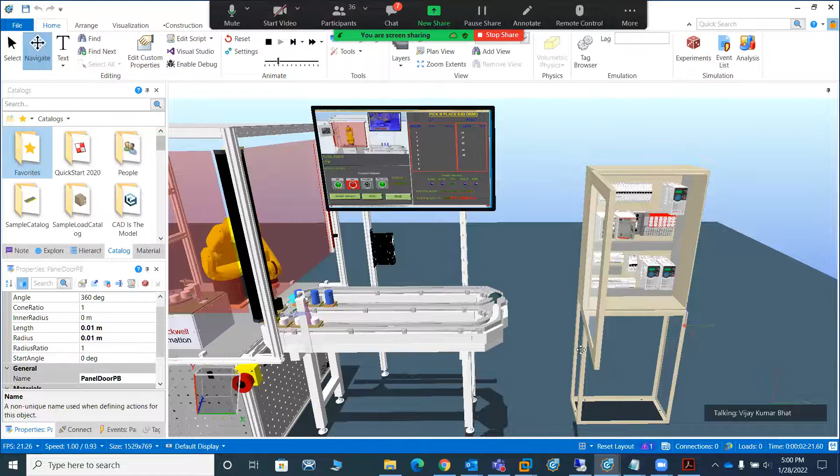We also have some more animations that have been incorporated into this model. You can see that there's a door opening which can happen here by hitting a door open switch, and in an identical manner the same thing happens when we operate the physical machine. So the machine would come to a stop condition. Immediately as we hit the button, the robot will come to a stop position, knowing that the door has been opened. And the moment you hit the button back, the door gets closed, and you can reset the system to start the machine again.

So that's the process that runs in the physical environment also, and we are simulating the same thing here in the virtual environment. And if I want to see how much is the ICT, which is independent car technology, I want to see the metrics of what is happening at the different stations of it. So I see a complete analysis from the table. There are 3 stations currently, and I can see which station is being more consumed or more utilized based on the job

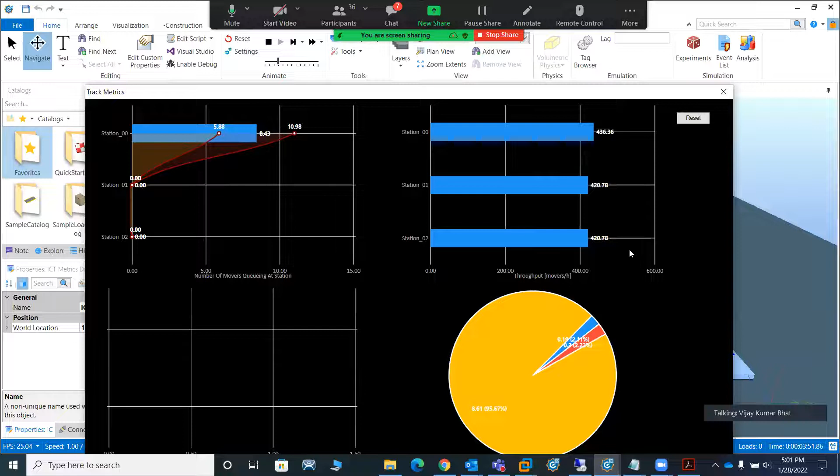operations. So you can see that there could be a long process in a shop floor environment. And if you want to see how the performances are going on at each station, we can check it from these metrics data and information very easily. So this is actually the digital twin of a model that we have created.

So let me take you now to the physical model also, which is actually available in our DTech Gurgaon office center. So this is actually the live camera view of the model that is working here, that I was just running in the virtual environment. Now this is the physical one. So as I assign a run command to this,

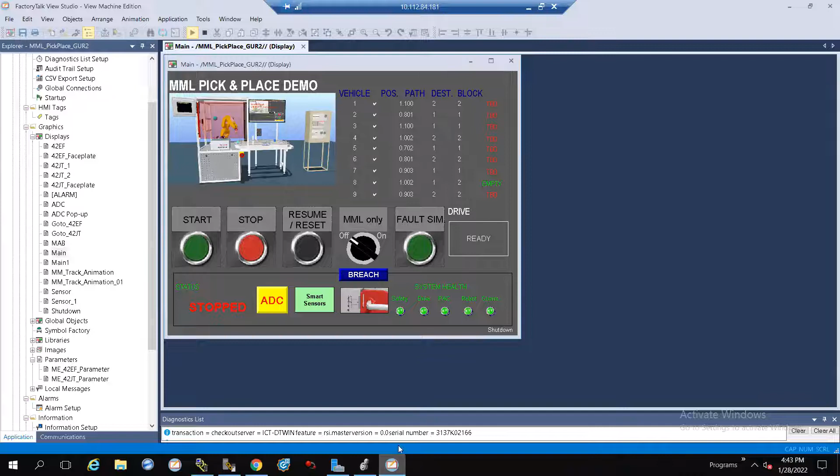I can give a run command to the system here, and you can see that with some countdown, the system will start functioning, and I'm doing it all remotely here. So the process is the same. This is the same ICT conveyor, which is independent car technology, which, as I said, is working based on the linear synchronous motor concept. And these are the moving vehicles which have defined ID numbers and defined positions, which are known to the controller, so that they can be directed to the required paths here.

And the Fanuc robot is picking and placing these objects one by one onto the turret. So these are all the sensors that you can see in front here, which are actually sensing the height, the color, and presence of these parts, so that they can be tracked and picked and placed onto the required positions as needed. So now if you see here, the sensors are blinking here. So what does that say actually?

In a machine there can be thousands of sensors. Now these sensors are IO-Link technology enabled, which means that they have communication capability where they can send the data and information to us in real time. So if I have thousands of sensors on a machine, and I want to locate any particular sensor, I will hit a button from the faceplate, and that particular sensor will start blinking, so that I get a 'locate me' kind of information for that particular sensor.

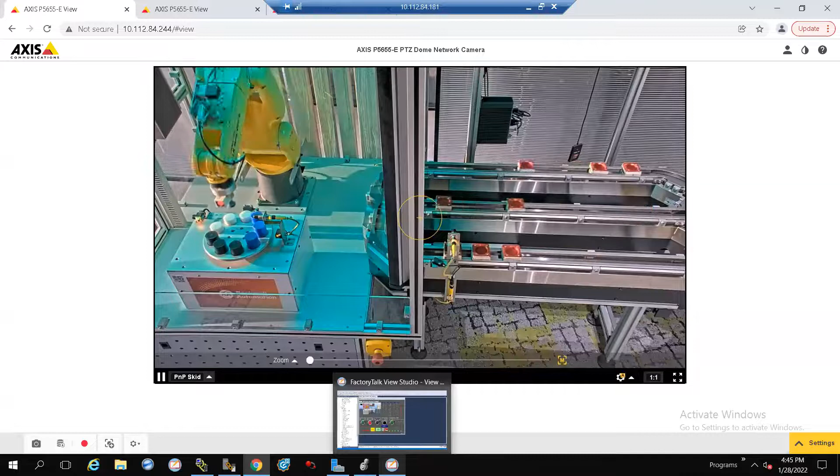They also tell us about the temperature they are facing, the running hours they have passed, and the environmental conditions they are passing through during the operation. So this is the physical model which is available currently at our DTech center, and we have also created a digital prototype of the same model that I showed to you.

Now, let me halt the system. Besides this, what we can do from the digital engineering also, we can do the operator training. So let me just show a small video here.

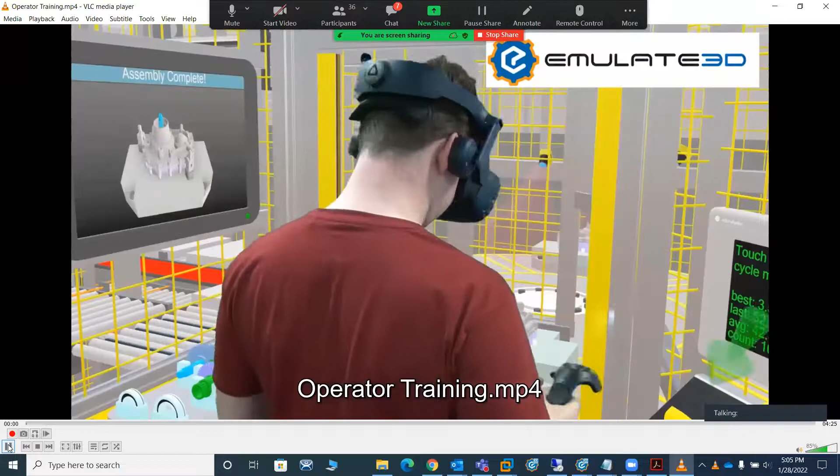If you see this particular video here, there's an operator who has put a virtual reality gear set onto the head, and this is a semi-automated machine where he's getting instructions on the left-hand side screen: which part he has to pick first and how he has to place it.

So if there's an operator or a new joiner and he wants to get acquainted with the machine, he can get well trained using the virtual reality of this digital twin software, and it guides him on which bearing part he has to pick, and the pink shaded portion on the object there shows how that particular object has to be placed. So this ensures that the part is picked up correctly, placed correctly, and once an operator does it several times, it is sure that he will not commit any mistake on the physical machines because he gets well trained on the system.

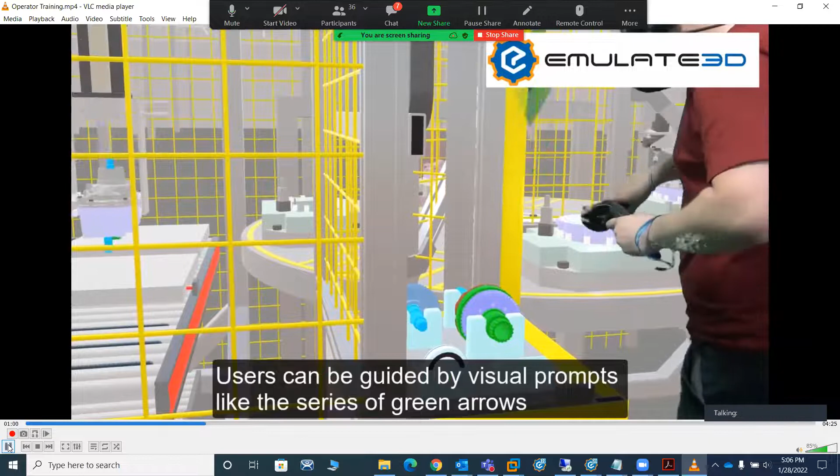And in the virtual world, if he commits any mistakes, for sure there is no damage to the mechanical system or machine or any possibility of injury to the personnel. So this is how the operators can be trained on this system using the digital environment. Besides this, we can also create a what if scenario. I have one more model that I'll run here, which is giving us information on the what if scenario.

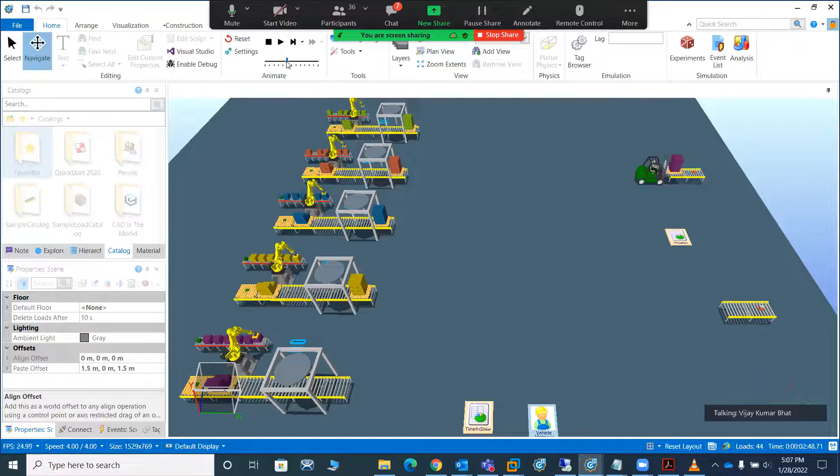Like, I have simply a couple of conveyors where some of the robots are picking and placing the objects, and there is one forklift which is picking and placing the objects from one point to the end destination. Okay, but I don't know how many forklifts are required here. When I was designing the system, I thought, let me save the cost, and I used just one forklift. But when I shared it with the customer, with my end user, he said, no, I'm not getting the best performance. There are 5 conveyors, so I should have minimum 5 forklifts, or I should have 10. That was actually building up my cost.

So what's the real scenario, what can I do so that I can go back to the customers and tell them, see, this is the best optimum performance that we'll get out of the system? So let me run a simulation, which is basically a what if scenario. We call it an experiment. I have configured this system so that it runs the configuration for number of vehicles from 1 to 5, and we'll see what throughput analysis we get. So we hit the experiment run button. The processes begin. Initially, it will start the first run where there is just 1 forklift. We can define the run duration for which we want to run those experimental sequences.

So now after that, the second sequence will begin. You can see that the number of forklifts is also changing in the scenario. Now you can have a third forklift placed into it so that the third experiment can be run within the given time. Then we will have the 4 forklifts running in the same time duration. And finally, we will have the last one, the 5 forklifts, which are being simulated to see how the performance is if I have five forklifts in the system.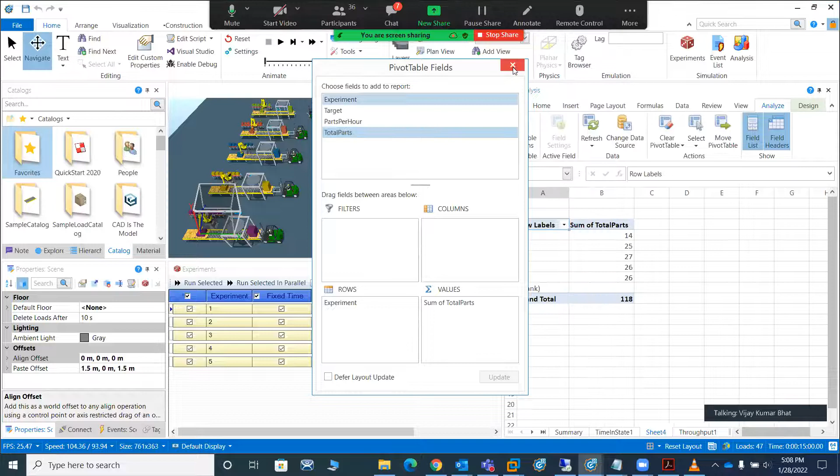So once I complete the experimental process here, I actually get a kind of Excel sheet generated on the right screen here, and I can use some basic Excel techniques on the number of experiments that I have done and the total value generated here, so that I can represent this in a graphical form, which gives a better understanding of how things are happening, so that I can show it to the customers in a much more understandable way.

So this is how the what if scenario of the digital model can be done, and we do not need to carry all this hardware to the customer. Just a small piece of software in a laptop and some program configuration running on the laptop, and show the customer how the system has been designed and what performance it is capable of. Besides the what if scenario, as I said, we can build machine prototypes or manufacturing line prototypes, and we can virtually walk into the plants.

We can wear a virtual reality gear set on our head, and then we can actually see ourselves going into the plants. So let me show a very small video about how we can take a walkthrough of a small plant, which is basically a cookie line manufacturing plant.

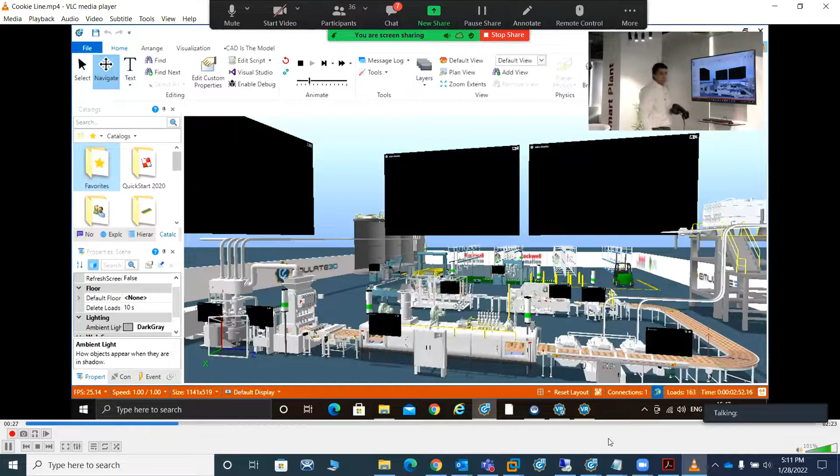So what I'll do is take a tour of this plant. Let me join and put on a VR gear, and then we'll have an experience of virtual reality where we'll go to different sections of this plant and see the various sections. Let me open the VR mode.

Here we see the different sections of this plant located. We'll start right from the mixer section, and from there go to the extruder section, where you can see the cookies are being formed and conveyed over the conveyor. Then follows the heating section where they are baked, and then we have the cooling section of this plant. You can see different motors running here, different fans operating to get the process done.

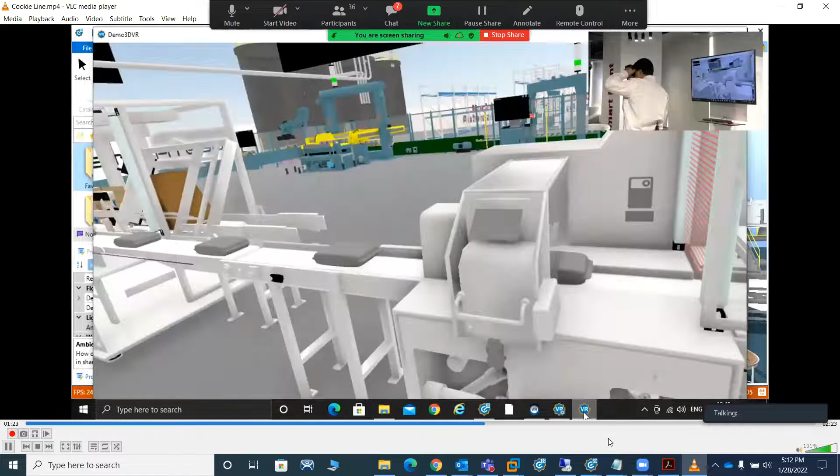After the heating and cooling processes are over, we have the packaging section where the cookies are packed into small boxes, and then moved to another section where they are put into a gray colored box.

Then we go to the next section on the packaging side, where these small boxes are put into cartons. These carton boxes are filled with the gray colored boxes containing cookies, and finally conveyed to a section where they are depalletized.

You can see the system moving all the packets onto the conveyor. Once this process is completed, we go to the final packaging section, where the big packs are wrapped together, and then a vehicle carries these goods back to the stockyard.

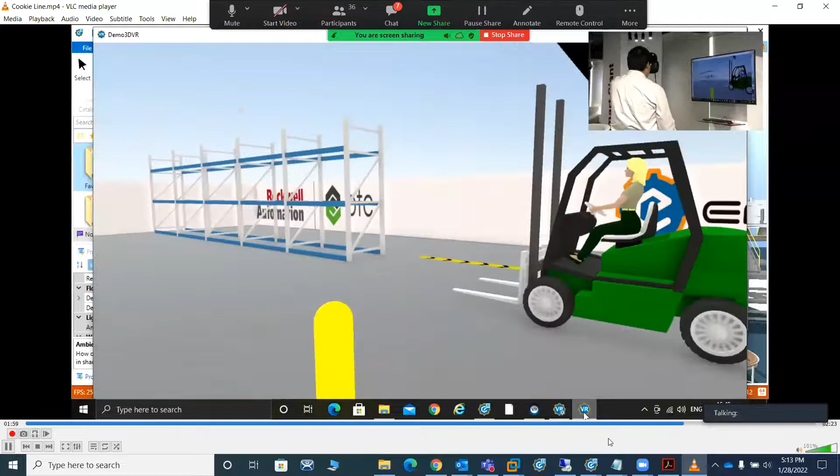These are the places where material is stocked, handled by this forklift, and we have different packages available. So this is the strength of the digital twin - it is not limited only to machines, but we can create the complete scenario for the manufacturing line or plant as well.

If I have created a digital twin of a manufacturing line, I can virtually take a walkthrough of it, and even operate different machines locally within the section. There are various screens available, and these screens can be made live, so the person can virtually operate them, start or stop a particular machine, or see the data parameters, whatever he wants.

Despite not being physically in the plant, he can make a virtual walkthrough using augmented and virtual reality technology, teleporting to different sections of the plant to see how the process is actually working. If it is integrated, it will show real-time data and real-time information. This is the strength of the digital twin technology that Pankaj was talking about.

So in case there are any questions, please let me know. Going back to Pankaj - any questions from the participants based on the wonderful demonstrations given by Pankaj, Abhirat, and Vijay?

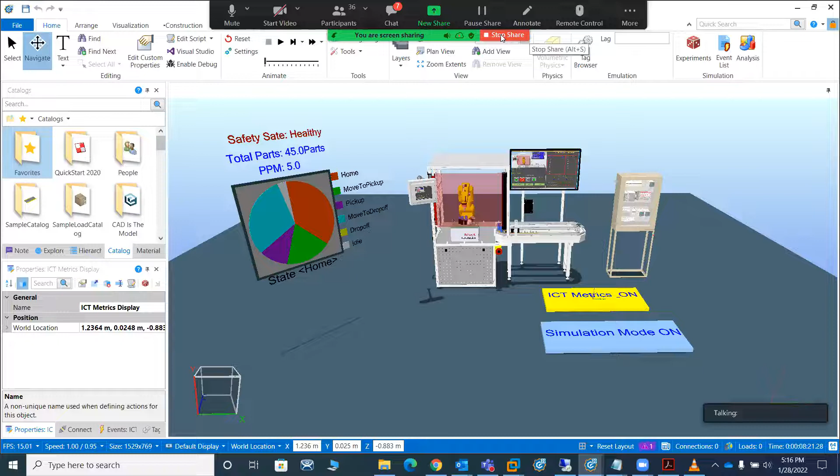So certainly you got a 360-degree view of the various technologies that will be helping us in developing smart machines. We also saw the virtual view of a complete plant and implementing the digital twin concept. We have a few more sessions aligned in the course itself which will take you a little deeper into the respective technologies. So this session covers a wide spectrum of the technologies involved in creating smart systems, and how they can be done, what platforms will be available. That is something for deeper learning, which we will take you through as the course goes along.

So I think with this, let us continue the remaining part of the session. I will be discussing more on the technologies for implementation of smart machines, and some experiments we are doing in FSM on development of these technologies, which I will share with you. But before taking the session forward, let's do a small exercise together.

That is what I always look forward to, because you have heard about smart machines, plants, and smart products. So what I will do is have a quick discussion, and I will note down some of the key points related to the smart machine concepts. So let's do this exercise, and let me share my iPad screen.

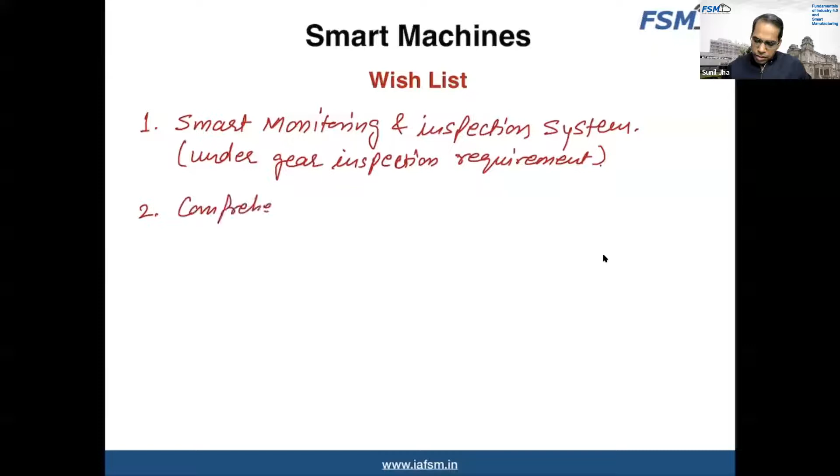So you're talking about a comprehensive system for this, no? I think that is it, a comprehensive system for measuring any abnormality, which can measure any unusual condition and send the information.

Good. I think these are coming out as very nice ideas for the compilation of the whole project. The idea behind generating this list is that we should understand which technology, which sensing, which kind of solutions can be built around the existing problems. So certainly these ideas are coming from your practical understanding of the situation, and that's why I'm just writing them. So a comprehensive system for abnormality detection, I think that is one. It's basically combining the various inputs and sensing all together to detect the kind of situations you are mentioning. Yeah, that's nice.

So I'm still looking forward to more points from the machines or manufacturing point of view. These are the points from the inspection and operations side. Would anybody like to give inputs from the machines point of view and the manufacturing facilities that you are using? What kind of smartness will you be looking for? Because when we talk about smart manufacturing, the machine is a very important element of that bigger smart manufacturing. Unless we start making those small systems smarter, we may not reach our goal of making a smart facility, a smart factory, or the Samarth Udyog we are talking about.

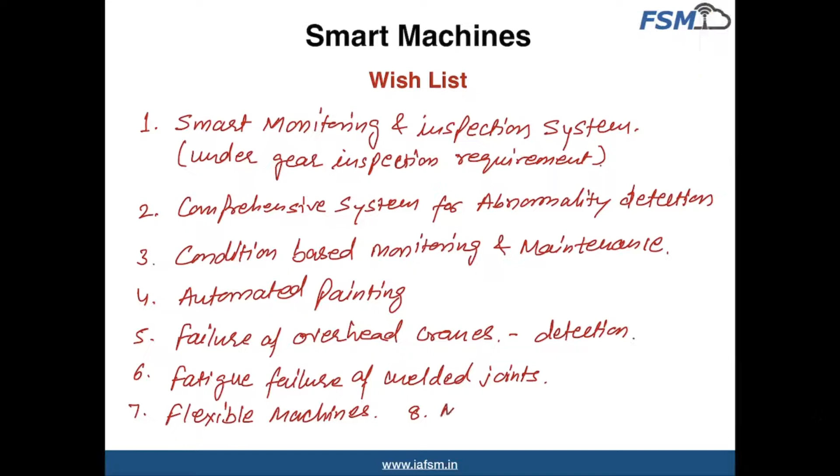Great. I think that is what I was looking for, these kinds of inputs, and they are wonderful. So we are all aligned and thinking in that direction, basically how the technology is going to facilitate us in building smart systems and smart machines. And as you are rightly pointing out, maintenance is a very painful area. When we are talking about complex systems and complex machines, rarely do we have expertise available with one single person to understand all the perspectives of the whole machine. So that is the idea I was looking at.

So any machine you are thinking about, as you have mentioned, whether it's a robot, a CNC machine, or maybe complex production systems, there are mechanical systems. You all understand the mechanical design, the mechanical components involved, the mechanical subsystems in operation in the machine. So some sort of information needs to be known about the mechanical system, because if something fails in the whole machine, how will I be able to locate which component it is and where it is in the machine, and then how it can be replaced, what kind of repair is required for that.

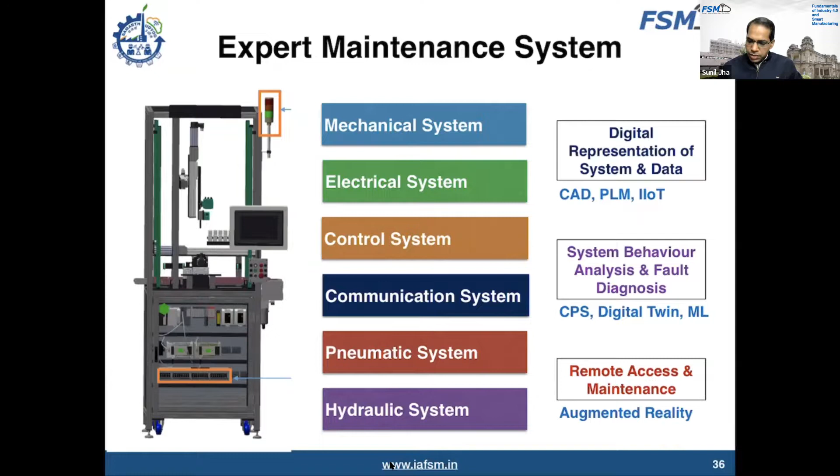The same machine running in one shop, one plant, and a similar machine running at a different location perform differently. The maintenance cycles of these two machines are different. The kinds of failure that happen on these two machines are different. So how can a machine benchmark and compare itself with similar machines operating somewhere else? That is also a very important part.